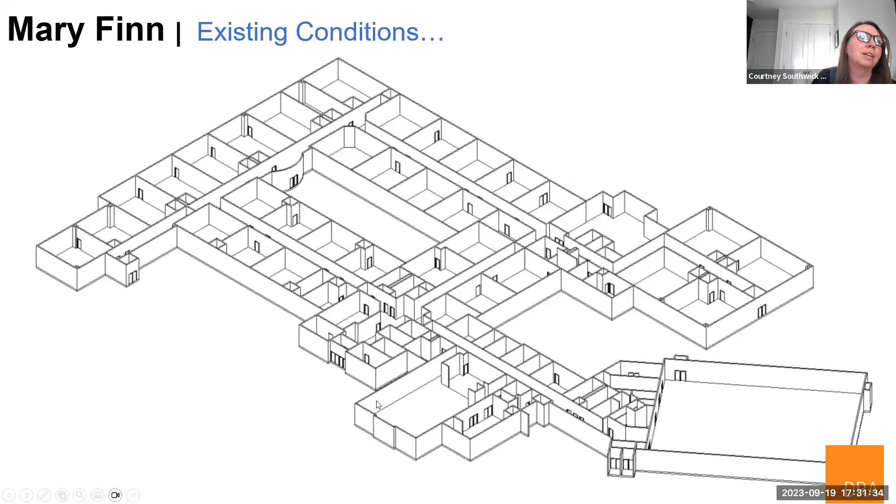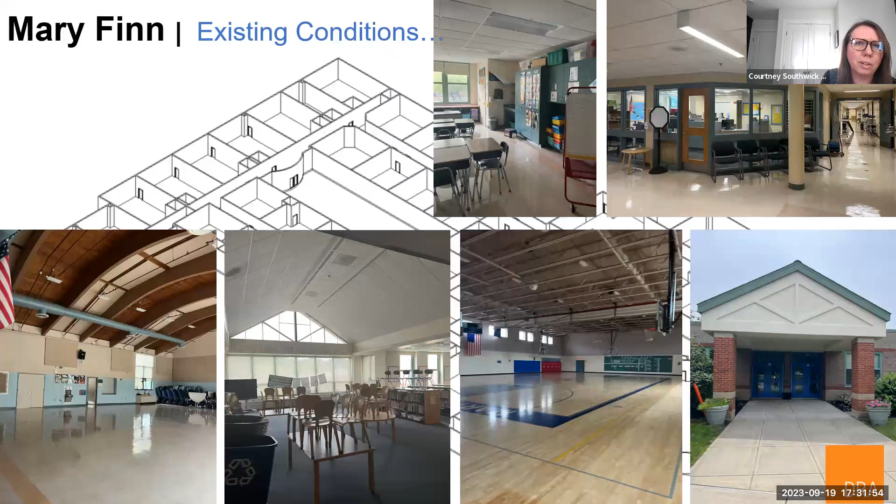What we know is that the building is in fair condition, and many of you have already been there and are familiar with it. Upon first glance, we loved seeing some of these spaces — they were in fair condition, and we don't anticipate renovation in any of these larger community spaces for the most part.

The gym is in excellent condition; we don't anticipate any renovation needed there. As for the envelope of the building, if no code upgrades are triggered, the brick is in great condition — we didn't see any structural issues or water issues walking around the outside.

In spaces like the library, it's quite a nice space that wouldn't need an intense renovation for certain portions. We also mentioned to Jason that we'd like to look at the acoustics in the cafeteria/multi-purpose room, or cafetorium, because it's a nice space but could benefit from acoustic treatment for different uses — whether a yoga class or a performance. I haven't actually seen a performance there, but just walking in, it was a very live, bouncy space.

Courtney asked, what do you mean by fair, like a fair building? When you use the word fair, what do you mean by that?

Fair condition means it's what you'd expect for that age of building — not needing repair at this time, and we don't anticipate something needing repair in the near future for whatever that component may be. So if the masonry is in fair condition for a 1964 building, it's looking great considering its age. We don't anticipate a lot of repointing, mortar repair, or brick repair needed in the near future.

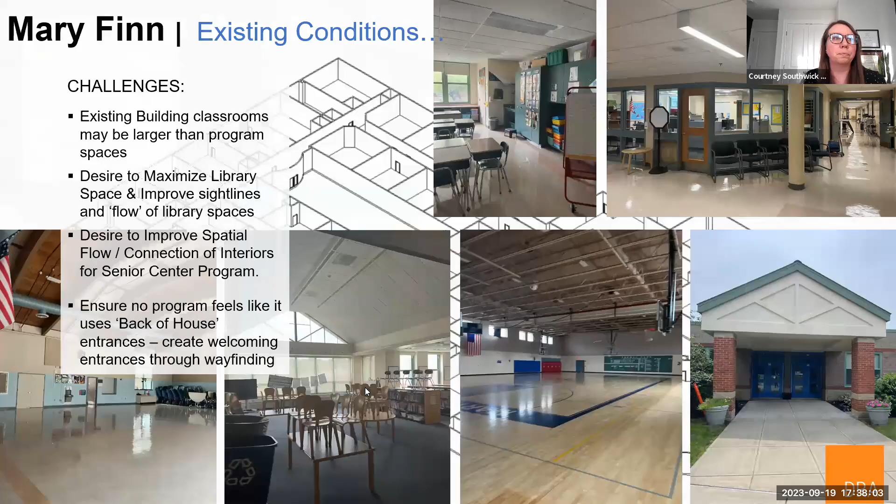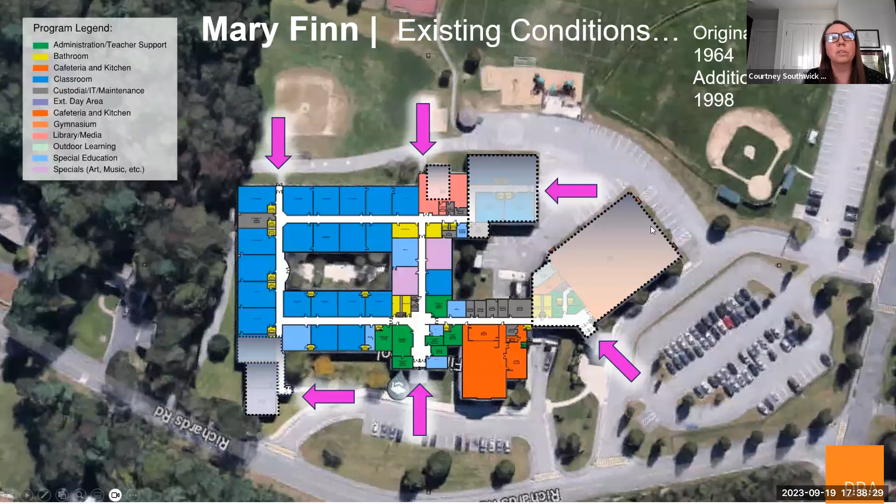So this is the existing plan. As I mentioned, there's a lot of benefits of these multiple entries into the building, but making sure it doesn't feel like back of house is going to be key with any of the solutions. The original building is the main bold portions here with the different classrooms. The addition is highlighted with this gradient - these are the addition portions of the building.

So just something for you to be thinking about as we're looking at these options. I've mentioned the different intensities, and I think it's important to keep in mind the scale of magnitude of cost per square foot for these different types of work. We've given the descriptions of the type of work to our estimator, and he's provided some current numbers we're using as part of this study. If you're doing a low intensity renovation for this type of project, you're looking at $150 per square foot, and that's finishes - changing out floor finishes, wall finishes, potentially ceiling finishes, and lighting.

Medium intensity renovation is stepping it up, looking at new toilet room fixtures in addition to potentially adding in doors, things like that. And then 400 per square foot is stepping it to the next level, where you're looking at reframing, redoing structural, opening up spaces, that type of thing.

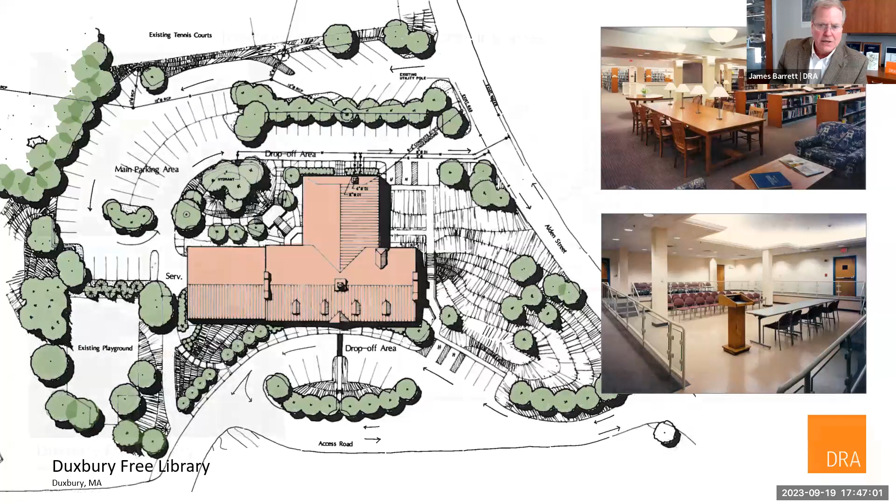Down below, this is an image of a public community meeting space that's made available in a way where it can be open to the public after hours, even after the library is closed, without exposing the library to security issues in terms of people venturing too far into the building. So with an element like that, things like toilet core, access, and security are all key concerns.

Given the structural components that were necessary to facilitate these changes, we'd see this at the higher intensity level as an example.

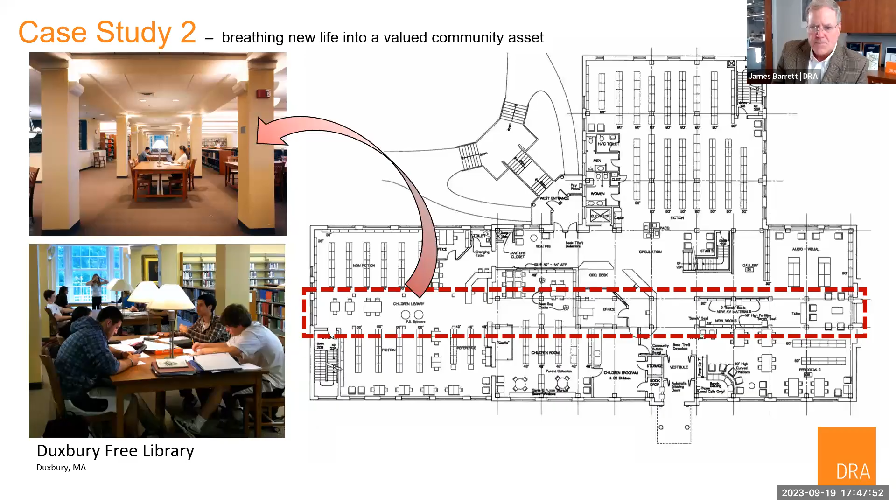Next slide, Courtney. So one that might fall in between, this is the Tolland Library. It was a former 1960s vintage elementary school. It is connected to an existing older elementary school complex.

Some of the challenges we had within it: many of the spaces we were inheriting as part of the library, or the proposed library spaces, actually had very little connection to the outdoors. That was something very important to the library staff and the community. So even in areas where we didn't have a large connection of space outside, we developed these little pocket areas with enough green space so you had natural light and a connection to understanding if it's raining or snowing outside, or what kind of conditions we have.

We also worked in this to improve the flow of the library. Yet in this case, we did not do it at the intensity level that we did in Duxbury. If we can go to the next slide.

This gives you a sense of the overall floor plan of the space. So the main entry point is found over to the left at the midpoint of that rectilinear area. And you can see, just as you come into the vestibule, the idea of being able to have immediately to the right of it that community space.

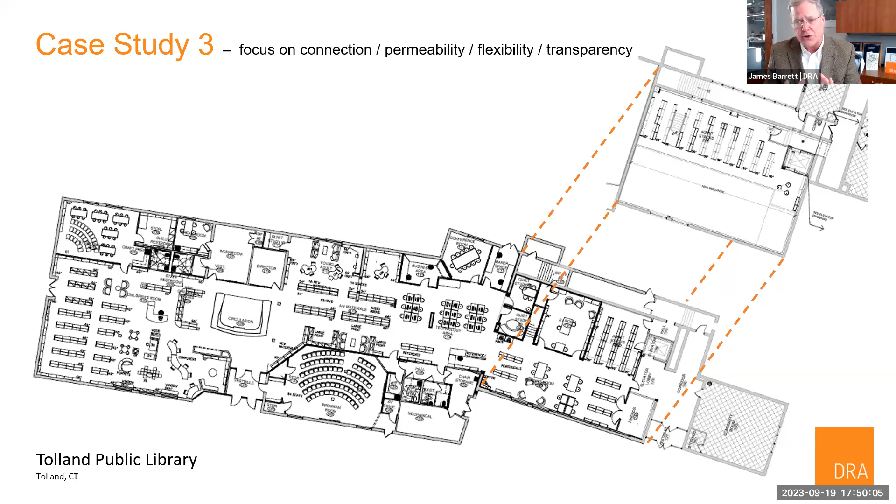So this was another example of making community space available such that it did not necessarily create a security issue for the rest of the library, should it be used before or after normal use hours. The space to the right is actually a double-story mezzanine space, inserted over a former gymnasium area. This did have a certain amount of structural component to it, but again, not at the intensity level we experienced with Duxbury.

This is an overall site plan that gives you a sense of the overall complex. At the upper portion of the site, the small squared rectangle is very much the town administrative component of their town function. So everything from town manager to various engineering departments works its way all the way back into the building.

The library, in the two areas of green—the light and darker green—are the areas that we focused on. This is an example of studying at the townwide level, where we studied this building in its entirety, and then at the specific use study level, focused on the two areas shaded in green. Again, this would probably fall into that mid-renovation category.

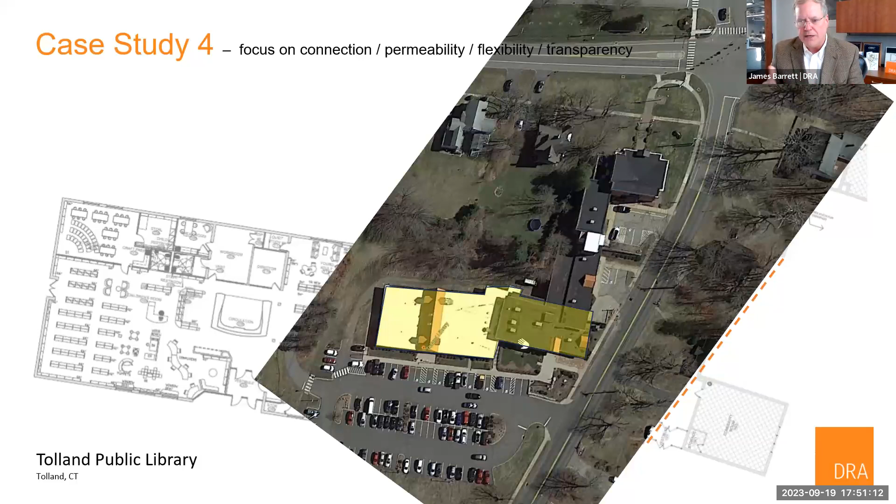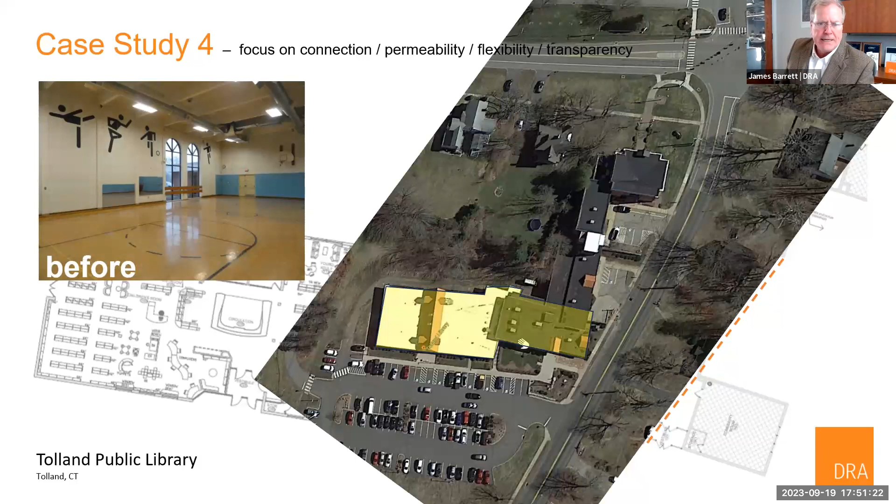This gives you a sense of the space before: the existing gym space, the type of windows found within it. And then this next image will give you a sense of the after, if you will—same space, reconfigured, reimagined as additional library space, helping to augment the existing library in a way that provided conference space, small reading space, areas for children, and mezzanine space for folks looking for a quieter place to study within it.

And next slide, please.

This is that multi-use community room space, and it gets a workout in many ways—in terms of late night meetings that might happen there, daytime meetings that might augment the library meeting opportunities, and then a wide range of flat floor community use spaces like the kids' yoga shown in the image to the right.

Next slide—another example of trying to open to the exterior, create spaces that have a sense of openness and a sense of distance in terms of vista. So really trying to create those opportunities within the space.

And the last case study that I'll share with you—excuse us, our case study numbers are jumping all over the place. That's on me. No, not at all, that was me scrambling these around probably at the last minute.

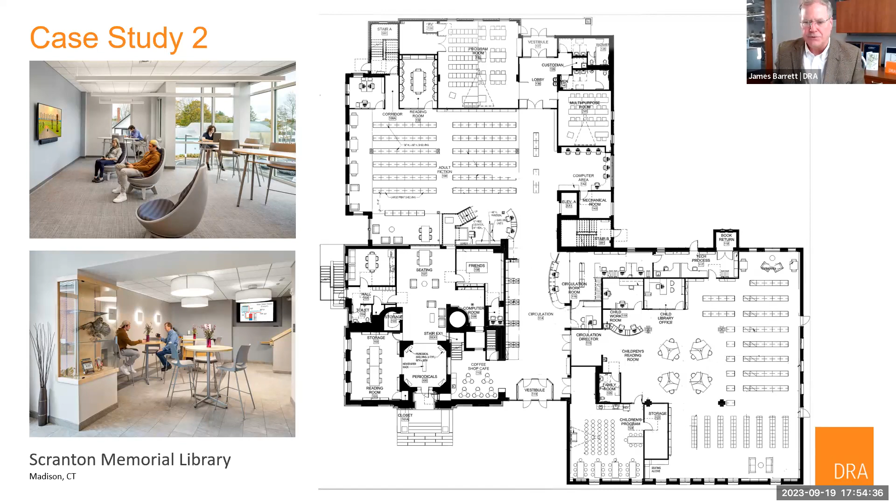This gives some sense of inside-outside. We have the Carnegie era library further in the view to the left, and to the back part of the addition, where we are working with the Historic Commission to reflect some of the architectural vocabulary that had been used there, but also working with them to understand that as a new building, expressions like large windows that create wonderful reading areas were also something that could be incorporated, and they agreed that should be the case.

The lower image gives you a sense of that kind of main street connector that connects front to back in this building.

This gives you some sense of material use around this building, everything from brick as it comes through to this ash product, very much like a Hardie board, but giving more of a residential feel and clapboard siding feel, because some portions of this building actually face neighbors that are residential in scale.

This aerial overview gives a sense of the types of other strategies that we employ in terms of helping these buildings become much more efficient than they were previously. This building approaches net zero. It does so through use of photovoltaic arrays, geothermal wells, use of natural light, drawing it down into the building.

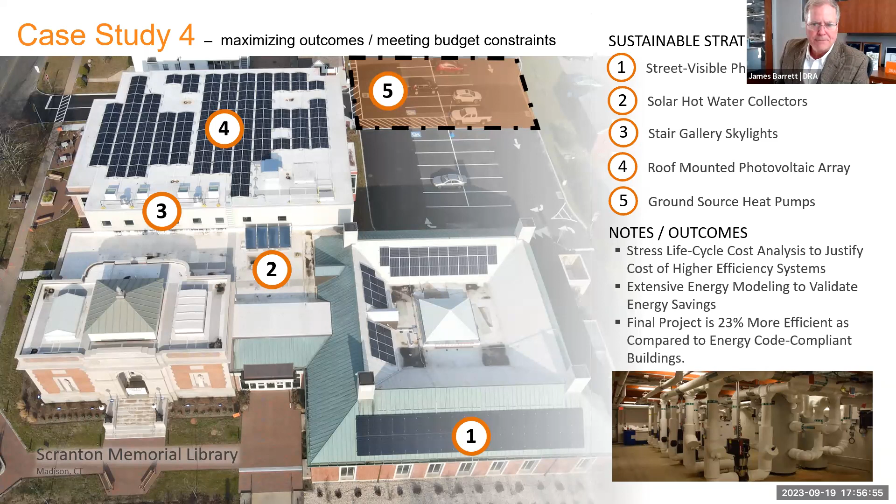Thank you, Jim. I think the point of showing you those images again is to help fuel ideas and possibilities of what renovated space can be, and the different scales of renovated space.

So again, we're looking at Mary Finn. The benefit here is we've already done, back in the 90s, the ADA upgrades. So that's something you don't have to spend money on for this site and for the interior of the building—those are costs already taken care of in the previous renovation addition for the building.

So are there any questions before I jump into the options?

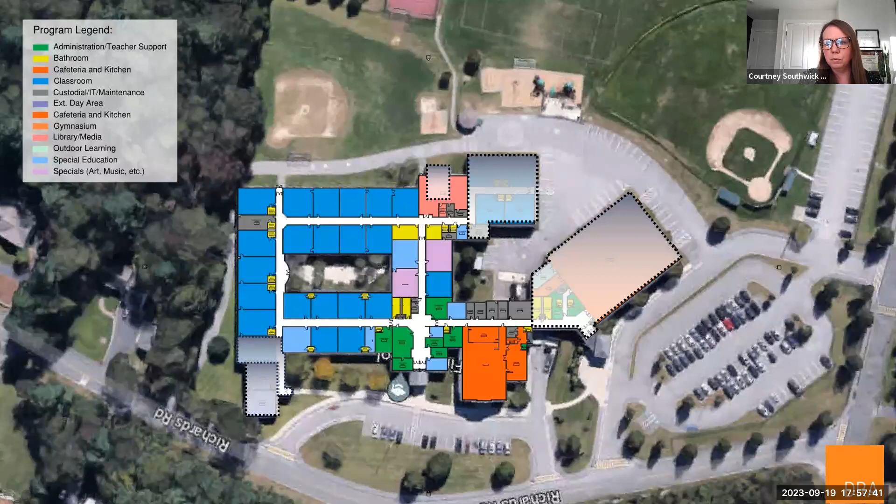All right, looking at option 1A, remember this is the lower intensity option. What we want to emphasize here is that we're showing site improvements in terms of parking, in two key locations: one on the south side of the site and one on the north side. When I say south, I mean plan south, not due south.

This parking helps facilitate the idea that we have different entrances into the building. We don't want any to be back of house. You don't want someone to have to park on one side and walk through the building to get to another department, or walk around the building, which is worse. So we want to make sure there are opportunities here.

Now, any of these options can be taken or left in turn. We do have some parking here already—existing parking and ADA parking near the main entrance of the building. So this is just showing expansion, taking over the smaller field plan north of the site, which could facilitate whatever department ends up on this side.

Here we're color coding everything the same way across all options. Green is the recreation department, purple is library space, orange is senior center space, and we are including youth and family in all of these options.

Although that's not one of the key spaces we're looking at, we know they are located in the South Union building along with the rec department. So relocating them might be an added bonus, and there is clearly space in this building to accommodate that—not just space, but also a separate entrance into that space, which is nice.

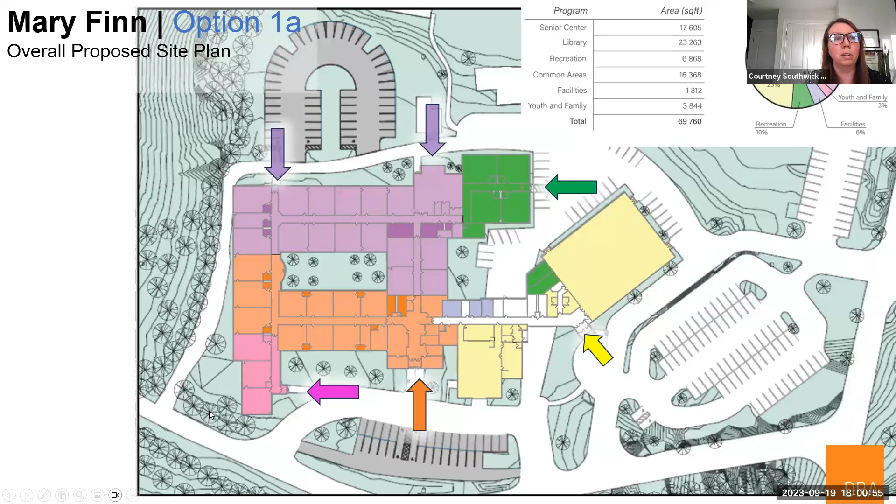We are showing the opportunity for facilities to move over here as well, because we feel they could benefit from some of the shared space. We know they are currently located in the same building as the senior center, which is also an added benefit—something we learned during the last study we did.

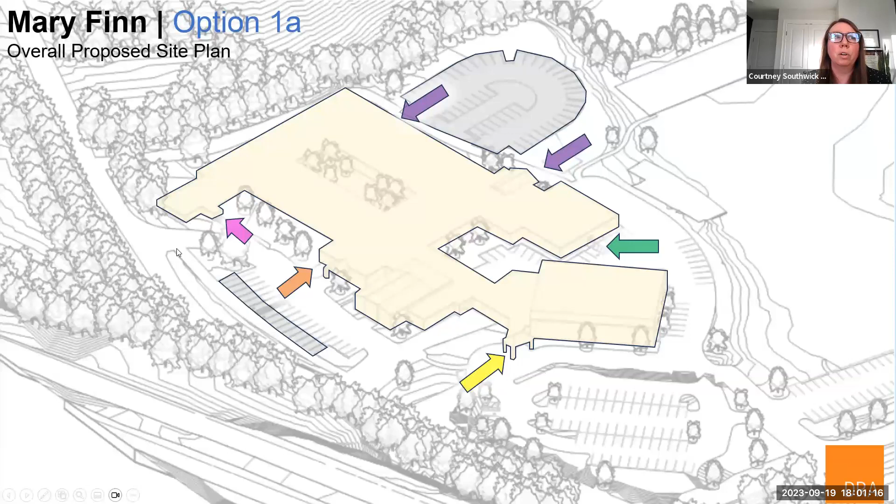So we're just looking at this from a bird's eye view, showing the parking zones. We think it's important to show that there's access from all these different spots, no matter the level of renovation. If you're not changing the envelope, you have opportunities to enter the building in multiple locations.

Diving into youth and family, we're going to show this once, even though it's included in all the options. There's a lot of square footage here. They do need a separate entrance, and it's nice for them to have one. What's nice about this little wing is that it was a previous addition to the building.

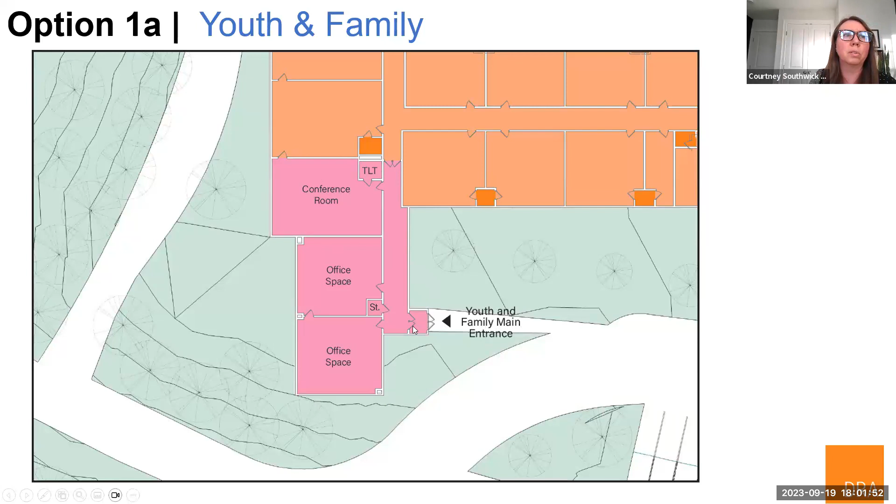This was done in the 90s, and it's fairly substantially separate from the rest of the building—there are doors separating it. So it has a nice acoustic separation in addition to its own entrance to the building, which we thought was a nice opportunity there.

Looking at the senior center, again this is plug and play—what programs can fit where. If you're looking at the building as is, this provides courtyard access. You're also entering into the main entrance of the building, which is highly visible. You could create signage there as you're entering, and then look at finishes as you come in, warming up the space and making it more welcoming, but not really taking down any walls for this option.

A question about that—are doorways getting bigger included in 1A, or is that a B-level renovation? It depends on how many you do. If you're looking at a couple of locations where you're opening up doors, that's not going to really affect your overall cost per square foot. But if you're starting to look at globally doing that for the whole senior center, then you start going up into that medium level.

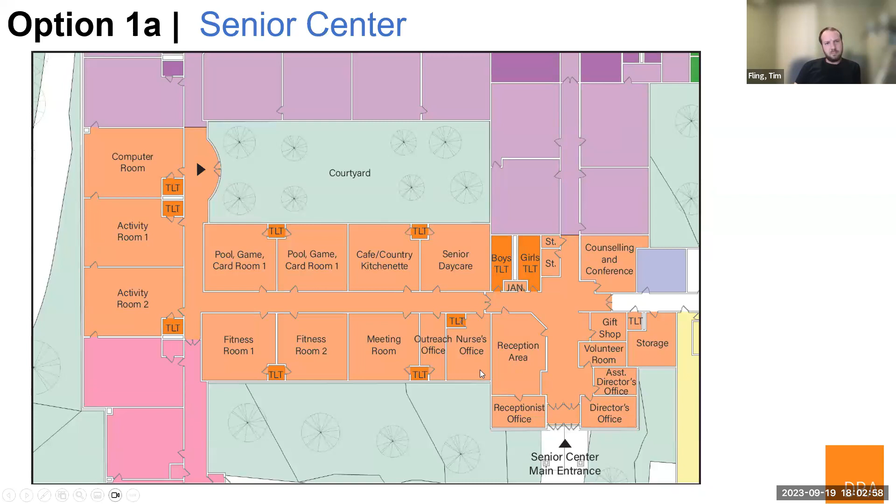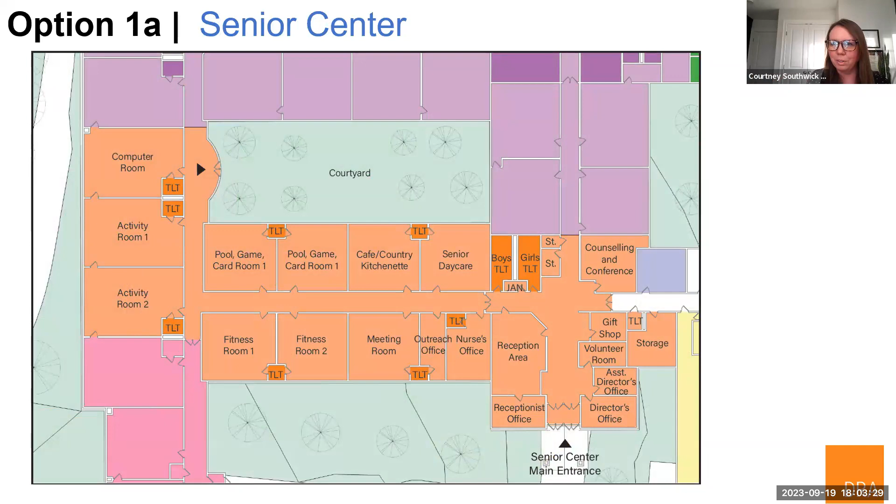What's nice about the plan, the existing Mary Finn has lots of toilet room opportunities, so plumbing is not a challenge here in terms of adding new plumbing and trenching slabs. Taking away plumbing is a lot less expensive than adding it in, so that's really nice about this floor plan. We show toilet rooms here, but they're not necessary to use, just there if necessary.

It's not a long walk - this is an elementary school, kids do it all the time. It's just that you're dealing with multiple uses now at this point.

Library, again, plug and play, looking at options here. What we like about the library is it has that existing library you're incorporating with a lot of daylight, courtyard access if necessary, and lots of conference space. This one actually has 23,000 square feet, which is higher than what we had previously shown for new construction, which was just under 20,000 square feet for a new library. But you're taking over a little bit more square footage here due to the existing wall construction.

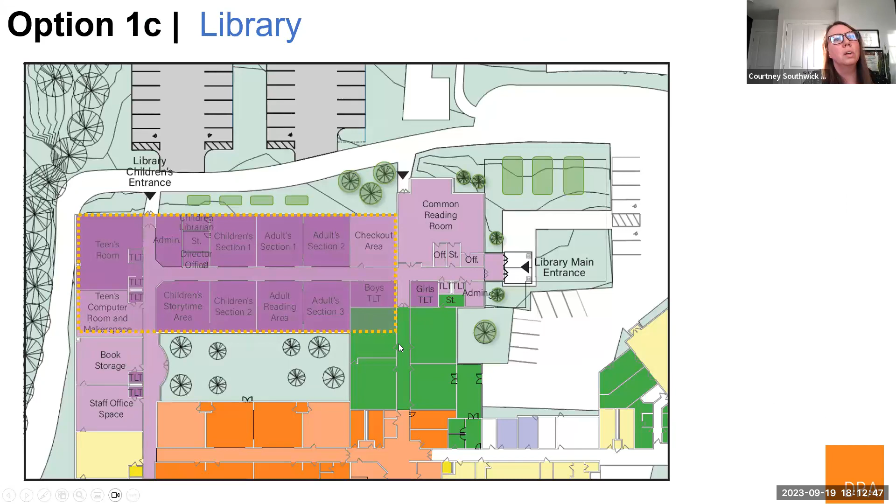Let me get the square footage on here - whoops, I didn't plug it in there. But this square footage is actually right on for the library. And this zone, like Jim showed in the Duxbury renovation, could also be treated and opened up in very similar fashion - it's your high intensity renovation. These walls could potentially become columns here, and you open up these zones to create a nice open flow to the space.

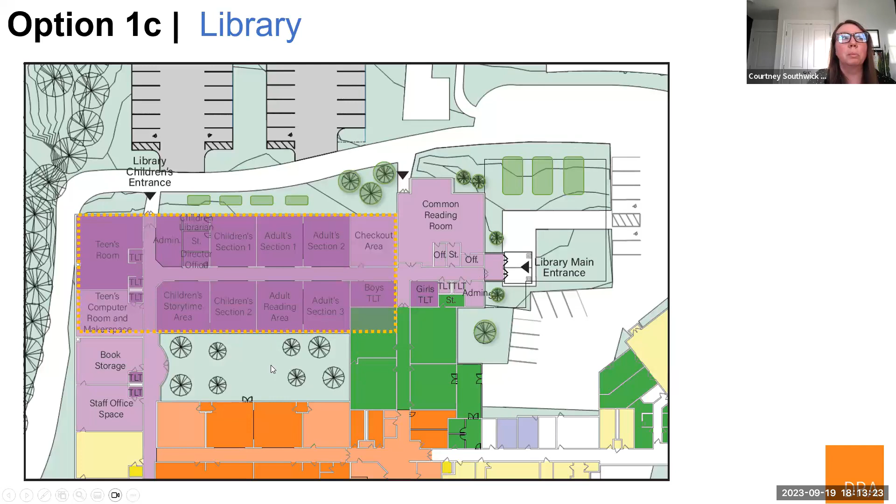This is a key component that may or may not be something you've thought about at first, but what it does is give you an opportunity to open up this zone, not just for the library, but also for this rec department option.

You'll see that in this slide. This rectangle is actually an addition to allow rec to stay interior to their space and have it continuous as you access the cafeteria and gymnasium space. And if I didn't highlight it before, we're showing this adjacent to the gym to be dedicated to the rec department and all its options.

Okay, so that's a quick overview of what we've been doing. We've put together a more comprehensive report with more data, and we're working on plugging cost information into all these options. But we want you to understand these are not final by any means, so we're looking for feedback from you on each of these components, which will be really helpful in making this successful.

Thank you. Thanks, Jason. Being mindful of time, if anyone has specific questions I didn't get out during that, let's get those on the table now, or any reactions, and then see where that leaves us in terms of time. So Tim, I see your hand up, why don't you go first?

Yeah, I'd just like a little more clarity about your thinking behind eliminating that addition in the back corner for option C. Is there no value, or do you see less value given the square footage available there? And could you still add that other hallway or some kind of corridor into these plans to help connect the spaces across? Do you think the entrance is more valuable than the square footage? That's kind of the crux of my question.

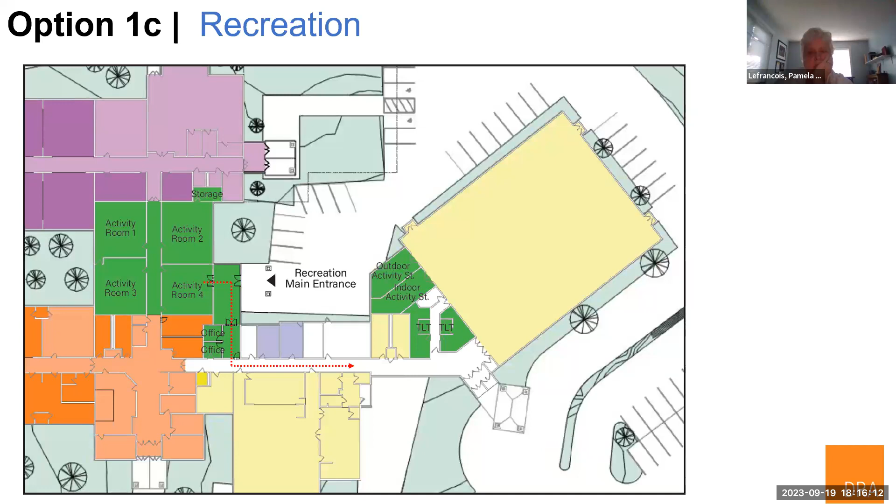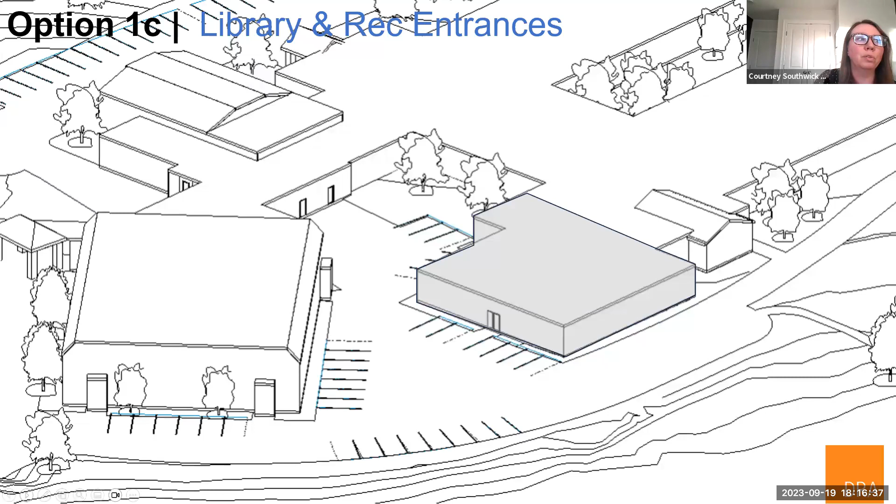I guess that really depends on the goals of this building. If the goal is to pack departments in with as much square footage as possible, then yes, you want to keep it. This is more about opening up an area that, when you stand here or drive around the building, really feels tight — I said nook, but it does feel very tight.

It's very back of house, doesn't feel welcoming. So if you're looking at creating a nice library entrance that doesn't feel back of house, and a rec entrance that's also a nice opportunity, this also allows that visual connection. I think it's important to think about this as an option — I understand the question completely, because you said we added this on for a reason, why would we take it away? Well, then this is a whole new type of project, so it's just looking at opportunities.

Okay, and second to that, did you explore eliminating that nook altogether, and maybe putting a building in between in that nook space? Did you explore or think at all about that opportunity and what it could look like?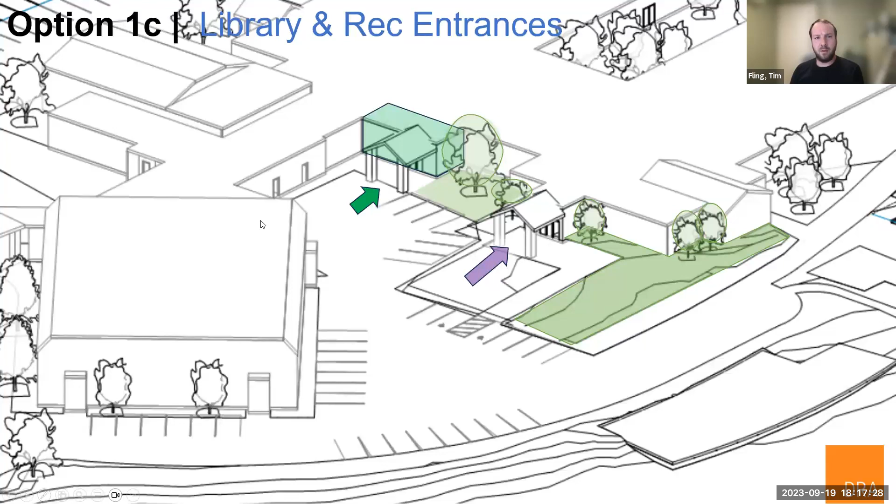That's a good question. It is an expensive option, to be honest. Over here, what we're not showing is there's an emergency generator that could be nicely screened. This is the main boiler room and the main electrical room for the whole building. Right now, access to those spaces is key, which is why I think they maintain this. So turning this into a courtyard isn't really ideal in terms of access to those spaces and life safety concerns, if you ever needed to egress from those locations out of the building. Typically you want those mechanical spaces on an exterior face of the building that's easily accessible. If we were to close those in, we'd have to relocate those spaces, which gets really expensive. Okay.

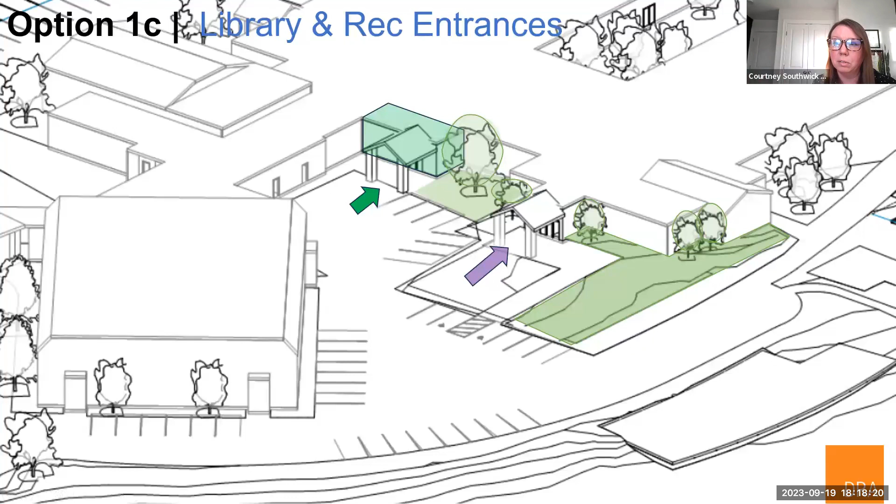I've got a question — I'm not great at looking at plans, but is there a space, like a hangout space, a living room area, like we're building with our current addition? Where would you see that in this? Am I missing something? You could subdivide this space actually, Pam, or even put something like that in what's called the courtyard entrance and seating zone. It's kind of deceiving on these plans.

It's a full classroom size space. You're talking about 900 square feet for each of these little blocks, so you could easily create that into one of your living room spaces.

And the other question, I guess it's the same concern we've already talked about, is there any way to soften up this space so it doesn't look like a school, straight hallway with square rooms? I understand what you're working with, but I don't know how to do that. I think that's a big concern of the council, that it not look like an institutional space.

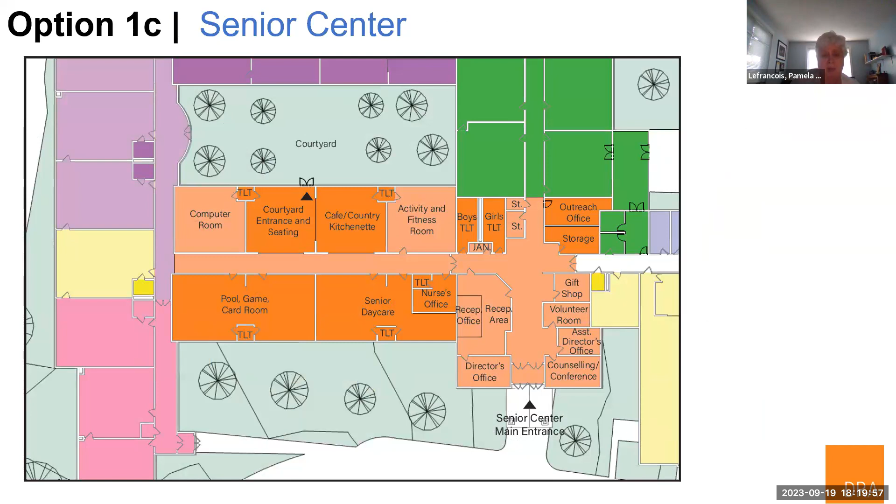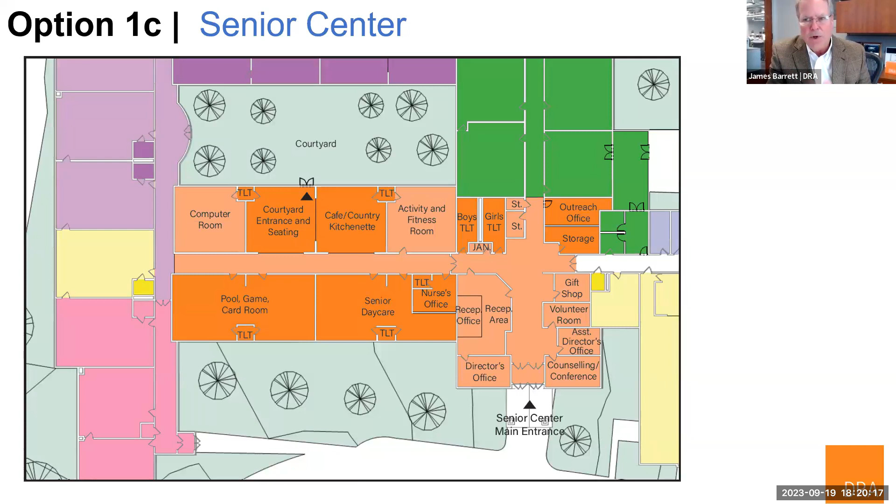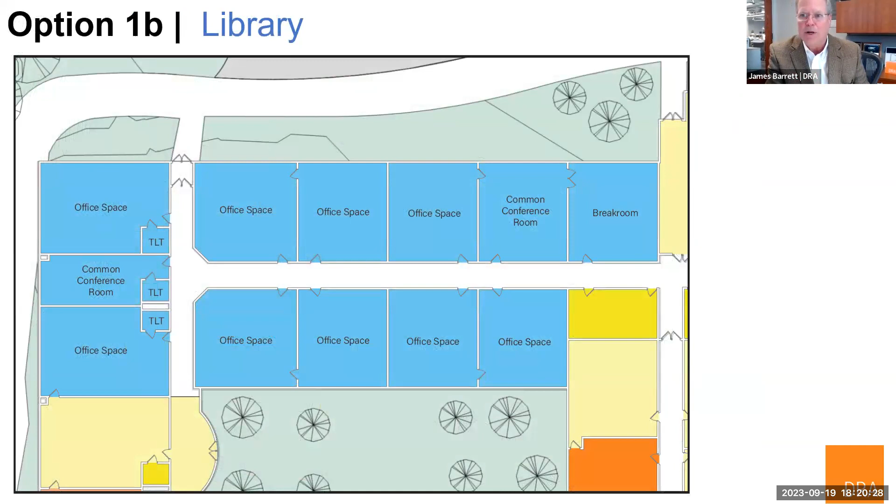They want it to be something comfortable. I'm not sure how many edges you can take off of that, but Pam, I would offer that you can think of this diagram as a test for square footage, a test fit of that space together. What you're speaking to is more the architecture or interior design response to that space - how do you make it feel more residential, more comfortable, and how do you approach architecture that's less institutional?

It's very possible within this type of space to achieve that. What you're looking at here is very much just the study test fit of that, if you will.

Okay, I understand. Yeah, it's the amount of space, and it has all the components in it. I just can't really envision how you turn that into something more comfortable.

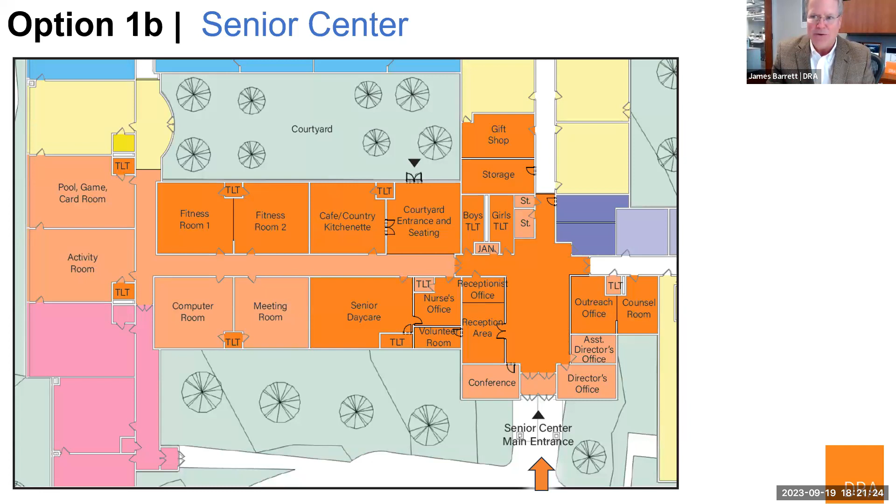But it's very much the next steps of the process to be able to understand those types of needs and then translate it into design work. There's really some tremendous opportunity with this location in the building, its connection to the courtyard, the amount of natural light available, etc. There are some really good bones to this space to work with.

I agree, that courtyard space is really neat. Even the entrance has a really neat component. That is really good because it gives us privacy but also access to the public, which is a strange concept for people to understand, but that looks like it'll give us what we need for that too, which is great. So that, with the other shared space, has all the pieces.

I'm just concerned about, in the end, more about the feeling, I guess. Understood.

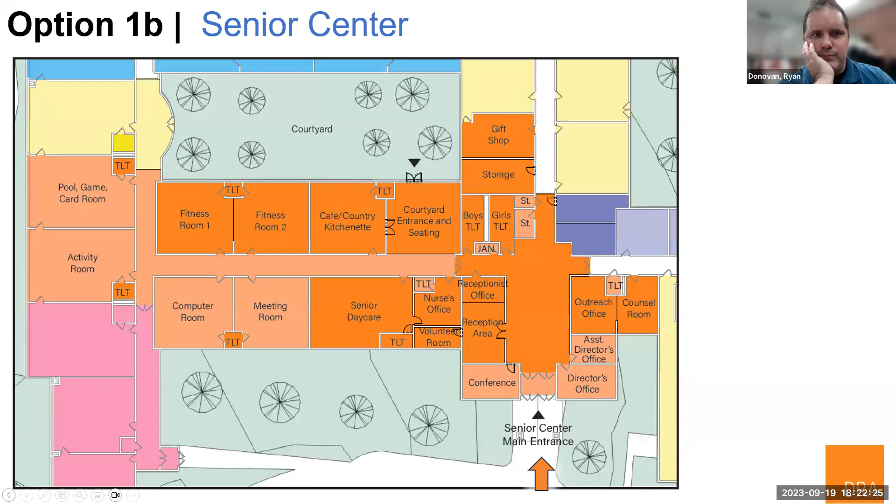Go to Ryan. Yeah, Courtney, I tried to put it in the chat, but would we be able to go to the library specific diagram for 1A? Would that be possible? Yeah, give me a second here, we'll get back to it.

I'll take this opportunity, since we're running to the end, just to thank you guys for taking a look at this. And I know Janet, I'll kind of say what I think Janet is thinking - we appreciate the integration of the parking issues that we brought to your attention during our initial conversation.

So basically the classroom walls pretty much still exist, right? Yes, this 1A is really that test fit, what works, and this probably in terms of access and visual connection and providing the appropriate flow that you would do for a new construction library - this is probably the least successful, but it gives us a baseline for what this would cost. Does it fit? Does it work in this space in terms of can we fit everything in with these other departments? So to be honest, this is probably more of a stepping stone than the appropriate best and highest solution for the library, if that makes sense.

Yeah, I always have to eyeball it from an operational perspective, and I can tell you that 1A actually does work a little bit better than 1C from a logistics perspective on my end, only because with youth services I need to ensure there's staffing - we wouldn't leave a children's area or a teen area unstaffed, in a perfect world. So I'd say the segmented nature of where the children's areas are - there was one potentially across where the hallway is, that would just be a lot more challenging, because then do I have to staff those areas separately? Would we have to expand staffing? So I don't want to get into the weeds, but from 1A I like how it used the existing library space to reconvert it into a children's area.

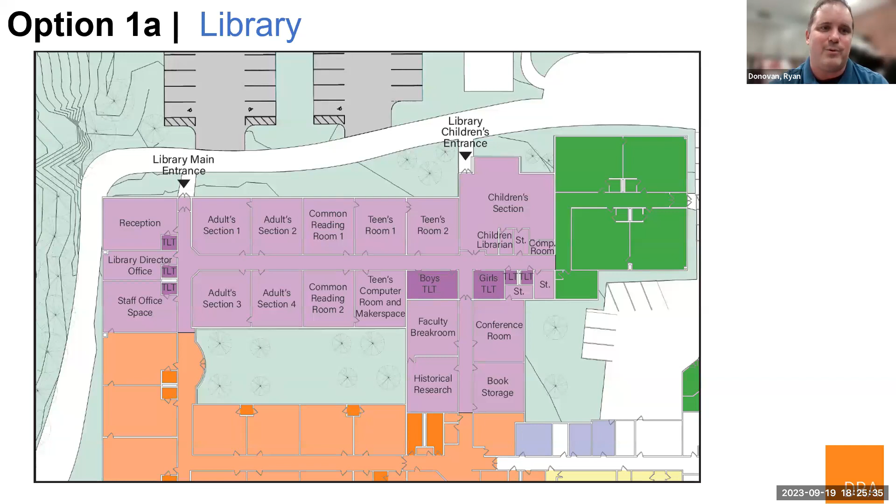I think that is helpful feedback, because even for that other option, we can look at those adjacencies and improve them to be the proper adjacencies we have here, but without necessarily all the segregation if it's not required in various locations, like with the adults. There are areas allocated for staff use, and there's a historical area in 1A. All of that were things we're looking at, things you guys already know we need space for, because we kind of talked about that. So I really appreciate this. I have to say, 1A is the one I responded to more than 1C, to be honest.

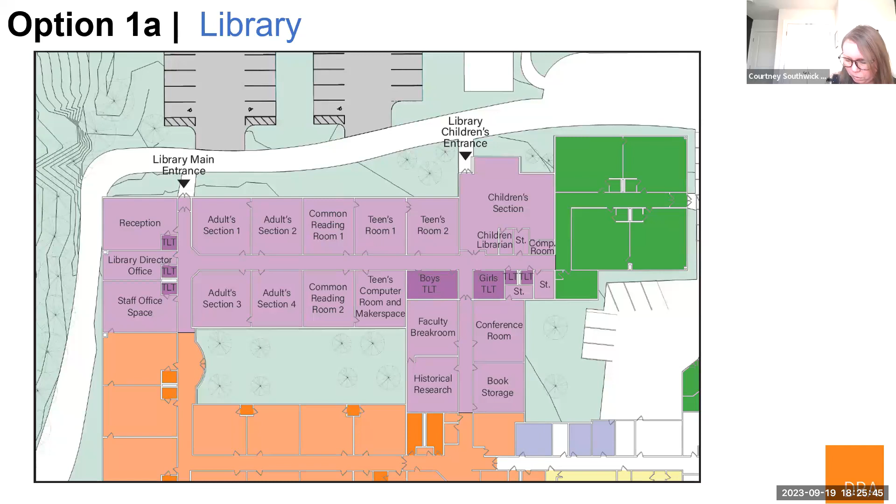I believe it would be beneficial for everybody to understand that things within these various 1A, 1B, 1C categories are very fluid at this point. So if you do respond to something very positively in 1A, Ryan, certainly that can translate to the other option as well, and vice versa. So I say that for everybody's benefit. If you see something that seems attractive, yet it's in a particular option that you don't necessarily support otherwise, these are very fluid.

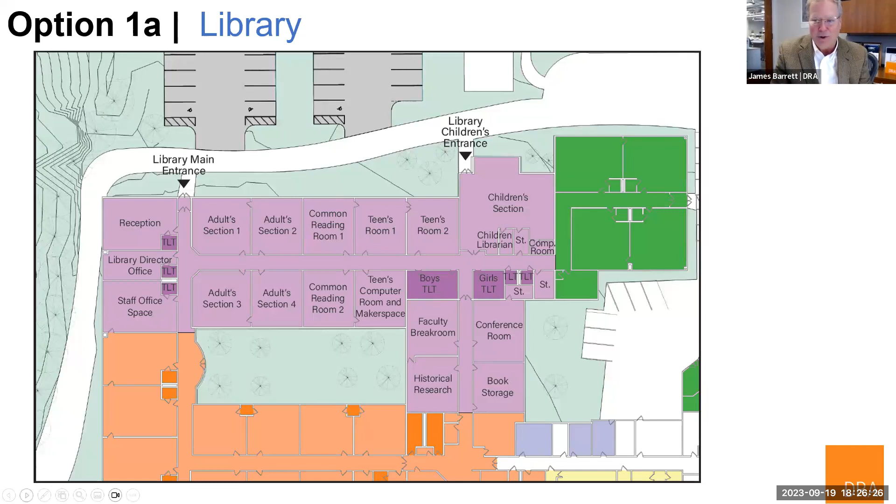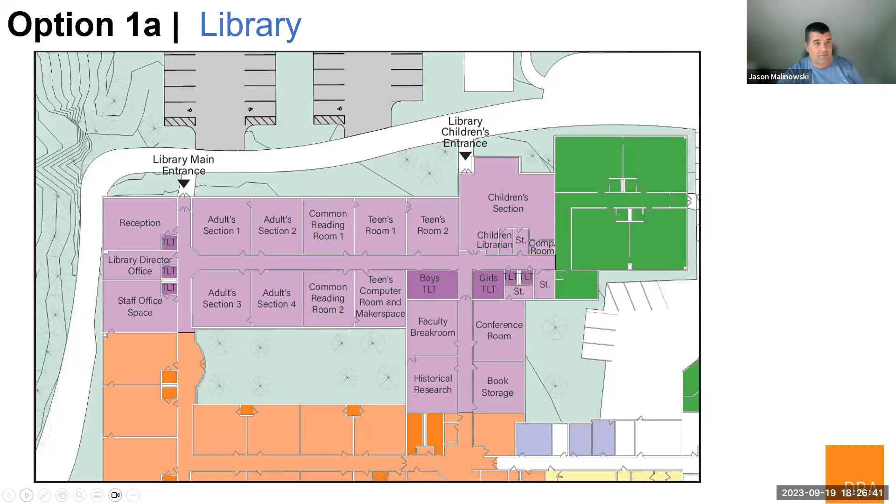Thank you for clarifying that. Obviously, I think there are many phases to go with this proof of concept. I was going to see if Tim Davis had any questions, and I see his hand went up. So I'll give Recreation a chance to speak before going back to Tim F.

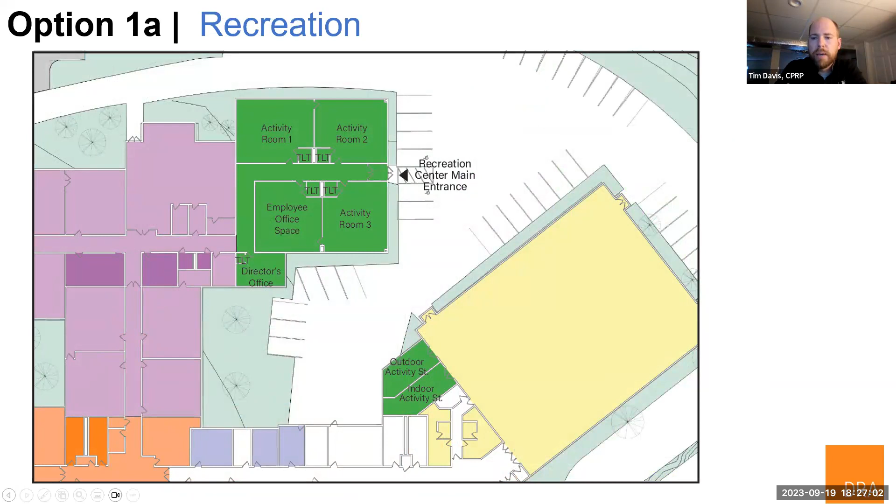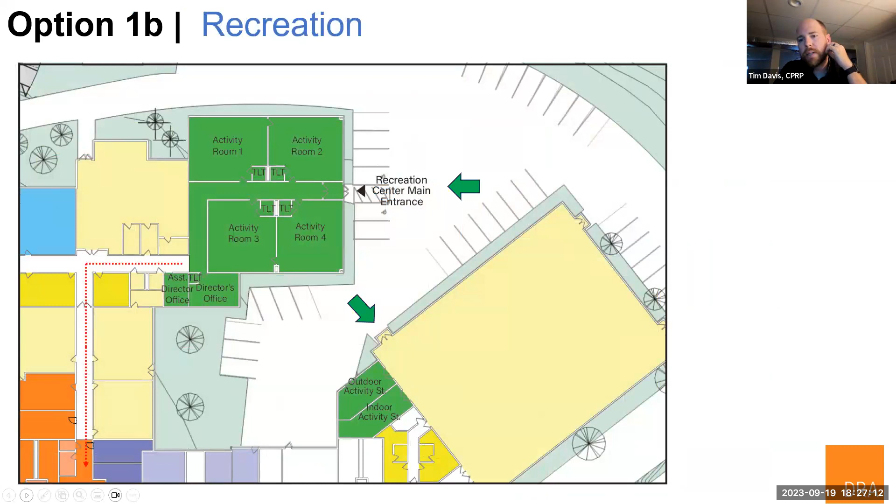I think I admittedly need to sit with this a little longer. My only initial thought, looking at it and thinking back from when Courtney and I talked, is when it comes to relationship with the other departments, I feel it would just be a better fit if recreation had more crossover and symmetry with the senior center than with the library. I think for me, there's concerns with the activities we do being connected with the library and that atmosphere. So while I know we're gaining a lot of common use space with the gym and the cafetorium and all that stuff, I just think proximity to the senior center will be better. So on this 1B, when you put us in the middle, that makes a little more sense to me. But that's just my initial take.

Again, just from thinking about it more since we chatted. Like I said, I think I've got to sit with it a little more, looking at what we have now and the totality of things and how it would benefit us. But again, my initial take would just be about location within the building.

And Tim, not to speak for you or Jen or the commission, but obviously this would result in the loss of a field in any scenario. I point that out just because we are going to have another big project in another part of town that would likely replace that and then some, if well coordinated.

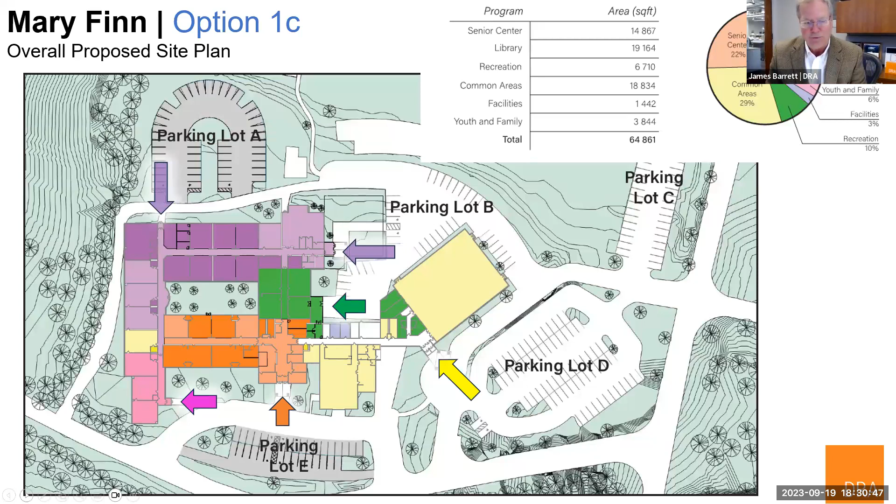Yeah, I think this does have opportunity, and I was looking at that too. You could easily recreate that over here as well and utilize a dedicated library parking, and then this would be more isolated and segregated for rec.

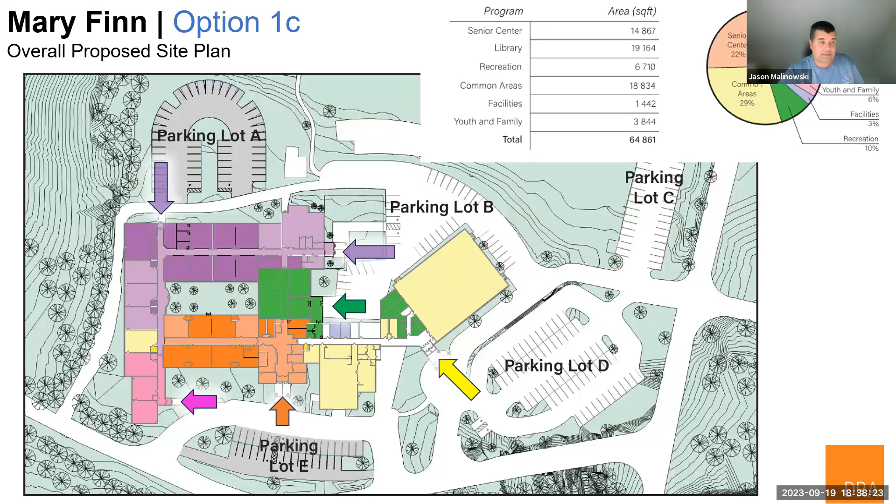All right, so I will do a poll on the meeting date, and I'm crossing my fingers this time. I don't see any public here, so we're not going to do any public comment. I just want to see if there's any other business to conduct tonight.